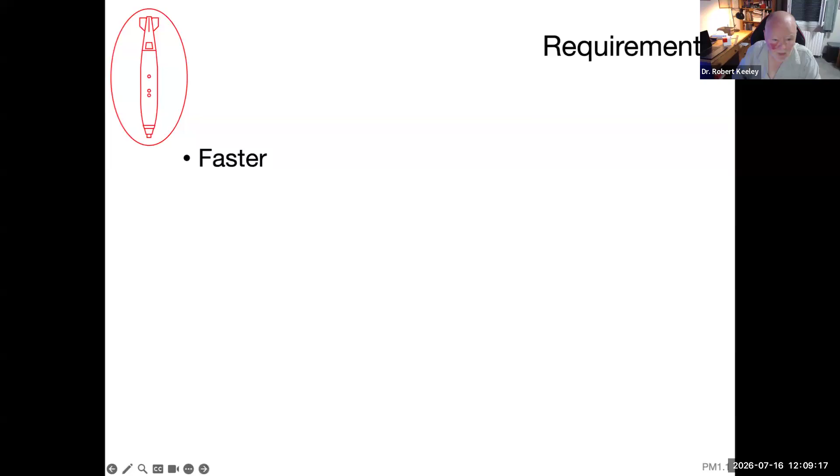So our requirement, and you'll remember this doctrine from before, we need to know how we're making this work faster - that's about improving productivity in terms of meter squared per hour - how we can make it cheaper, reducing our cost in terms of dollar per square meter, or can we make it safer? This is an interesting question, because manual demining is already generally very safe if the IMAS protocols are followed, so the product of manual demining is also generally fit for use if those same protocols are followed. So our requirement, if we're trying to make things faster and cheaper, is no overall reduction in safety. That's the minimum that we require.

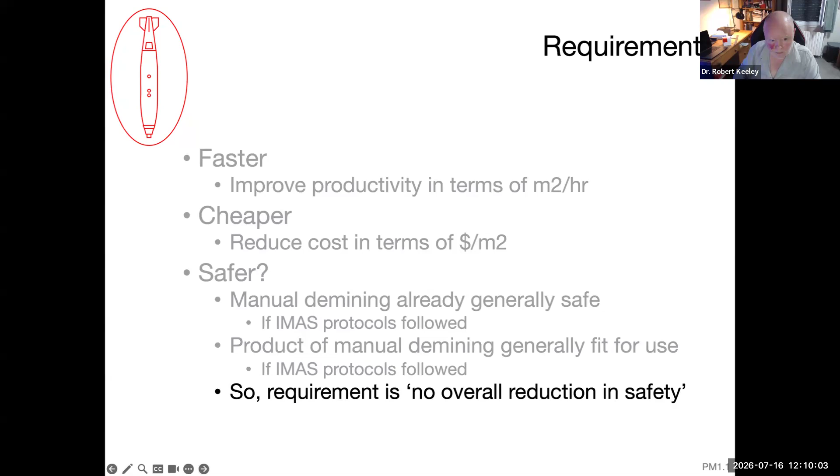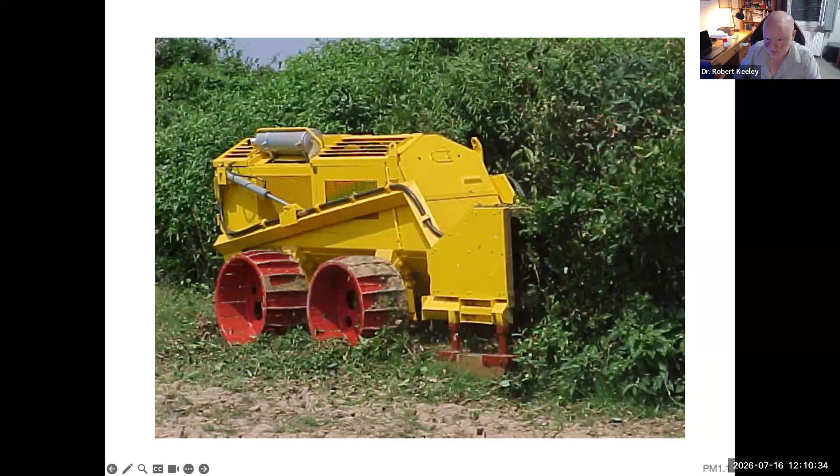And there have been solutions made in the mechanical world, such as this machine, for many years. This was developed as a brush cutter. You can see it's remote controlled. There's no cab on this. It's not crewed, and it was designed to cut down, in this case, the bamboo in Cambodia that people like our manual deminer were having to spend a lot of their time cutting before they could get to work.

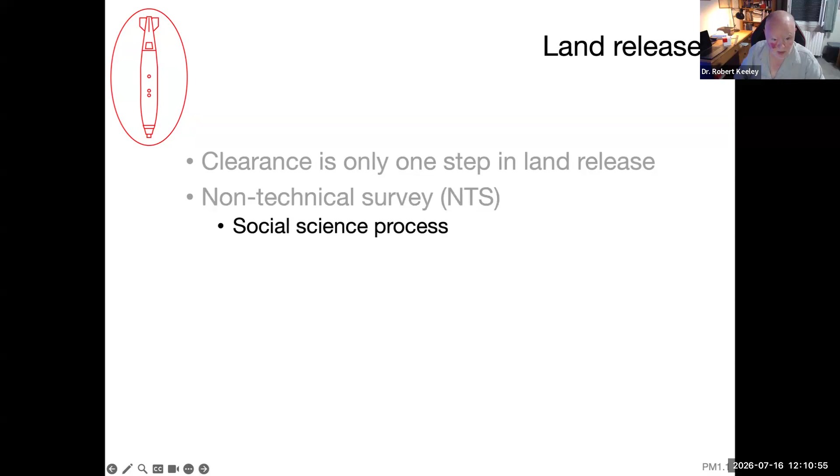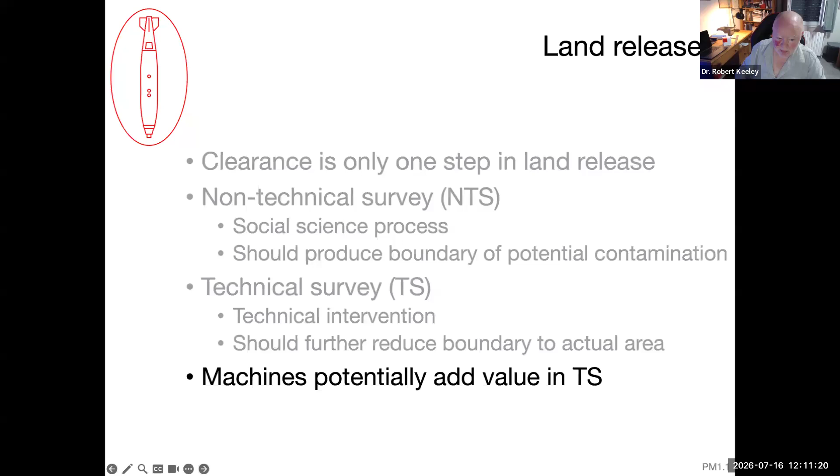Since those original early days, we've developed this concept called land release, and clearance is only one step in land release. It starts with something called a non-technical survey, the NTS, which is a social science process, and that should produce a boundary of potential contamination. That can then be followed by a technical survey, which is a technical intervention, and it should further reduce the boundary to the actual area that is contaminated. So machines in particular potentially add value in technical survey as well as in clearance, either directly or by reducing the vegetation so that they enable, for example, dogs to be used on that cleared area.

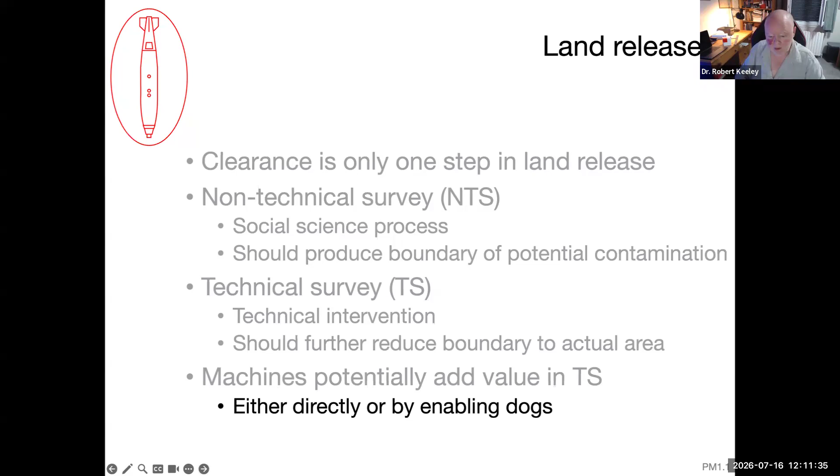So the aim of our presentation today is to introduce testing and the evaluation of machines, to introduce some of the problems that we have and what we need from testing arrangements.

Right, so common types of machines. We can describe machines by three different attributes: the type of tool that they employ, whether they are invasive or non-invasive, and whether they are crewed or remote controlled. Size is also a factor, and we'll be talking about that later in more detail.

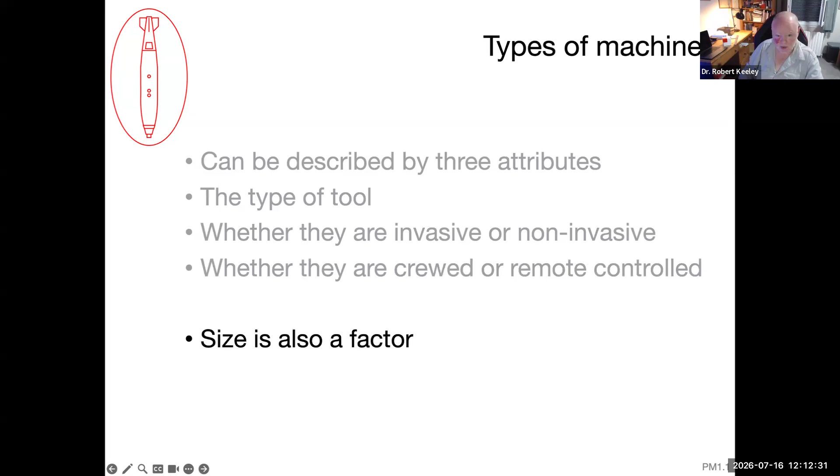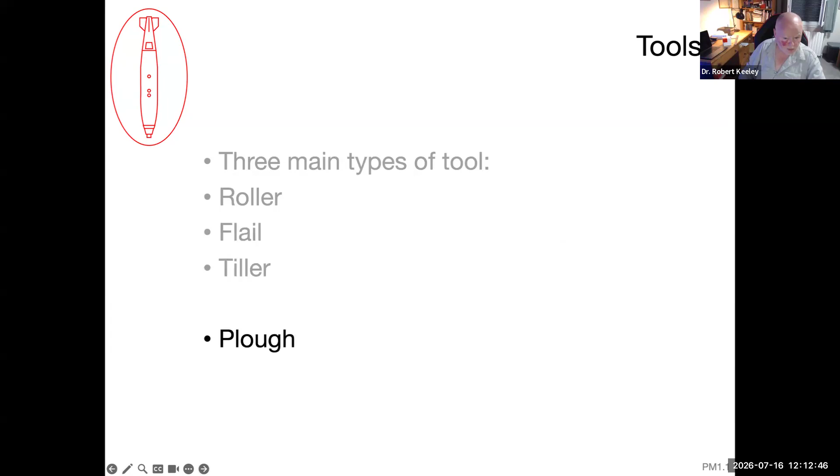So there are three main types of tool. We have rollers, we have flails, and we have tillers, and I will introduce all of those. There's also plows and explosive hoses, although we won't talk about most of these last two in detail because they're generally used in military minefield breaching rather than mine clearance. Happy to talk about them afterwards if we've got time, but today I'm going to focus on the three main types of tool.

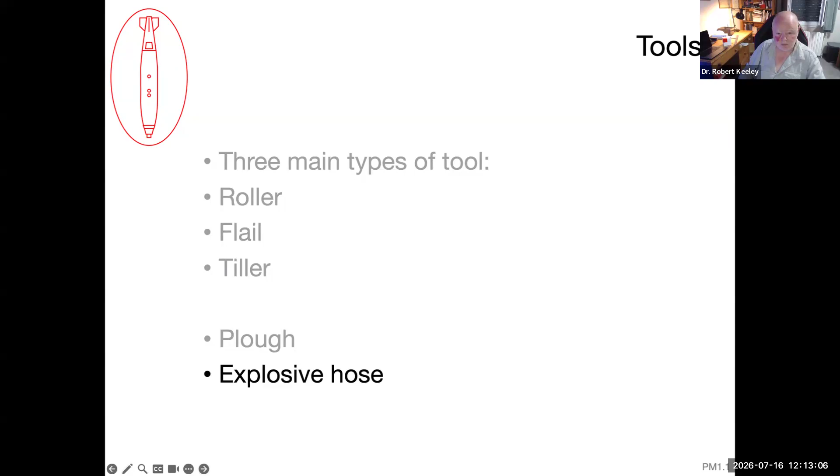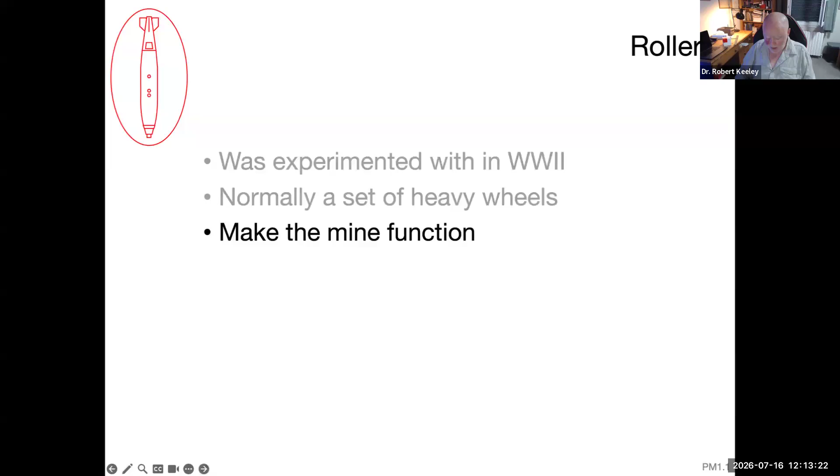That's what we'd normally expect most anti-tank mines to function when the weight of the tank goes over the top of them. So what a roller does is it's built onto the front of the tank so that the mine detonates safely in front of the tank.

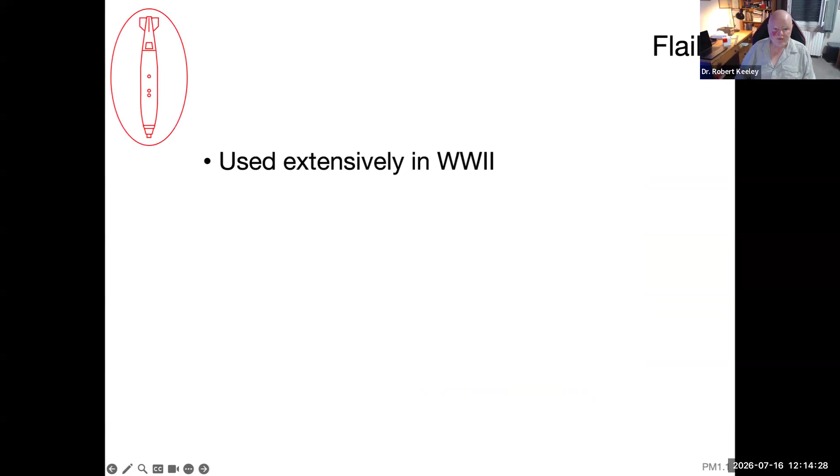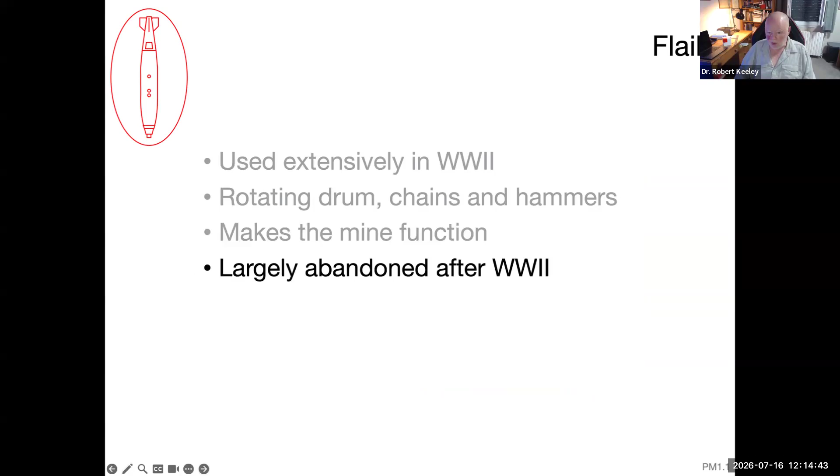So then we have flails. These were used extensively in the Second World War. It's a rotating drum with chains and hammers fitted to the end of those chains, again designed to make the mine function as intended. They were largely abandoned after the Second World War, but were rediscovered after the Falklands War in 1982.

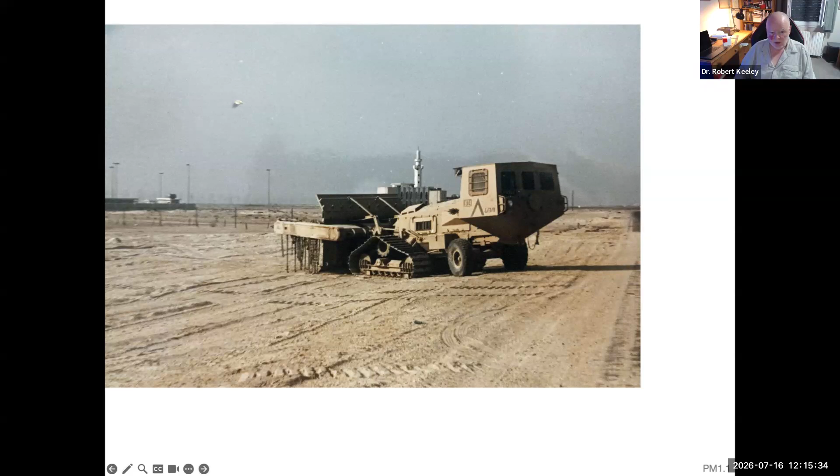Here you can see - I was just lucky with this photograph - we managed to capture the chains turning, and you can see the hammers on the end of the chains striking the ground. Please note that they're striking the ground, we'll come back to that later.

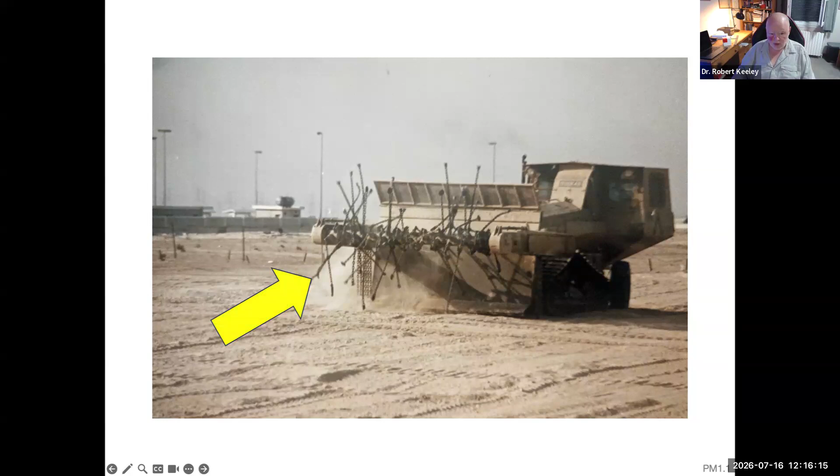You can also see that the cab, because this is a crewed vehicle, is situated right to the rear of the vehicle, and there's also a protective shield between the tool and the cab. So here's our chain and the hammer on the end of it.

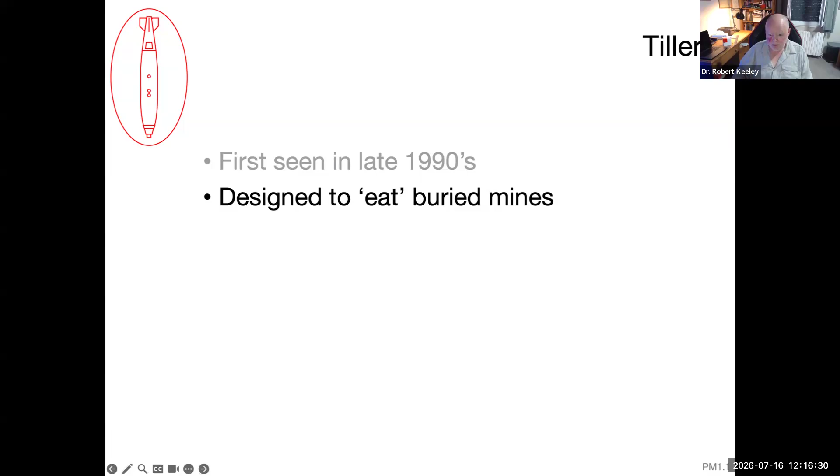And then finally, tillers. Tillers were first seen in the late 1990s, and they were designed to literally eat or chew up buried mines. So this was a very different idea. Because of that, the tools had to be very strong to withstand the explosion if they actually detonated the mine. So because the tool was big and heavy and strong, it needed a heavy vehicle to carry it. So the first tillers were stuck onto the front of tanks or similar vehicles.

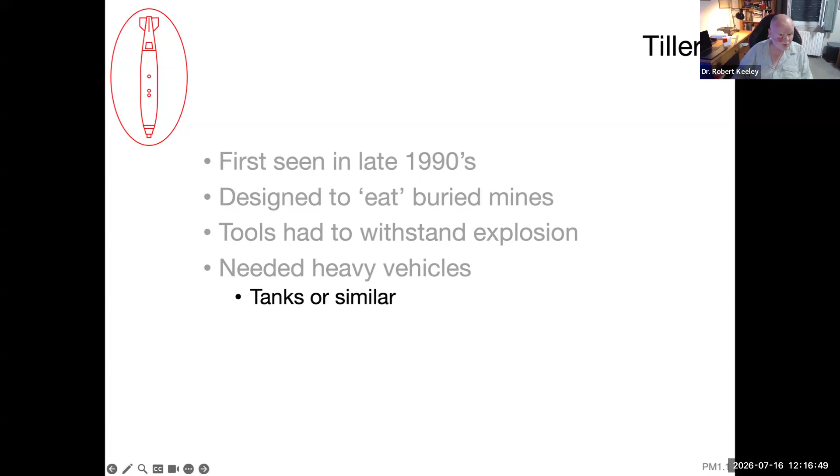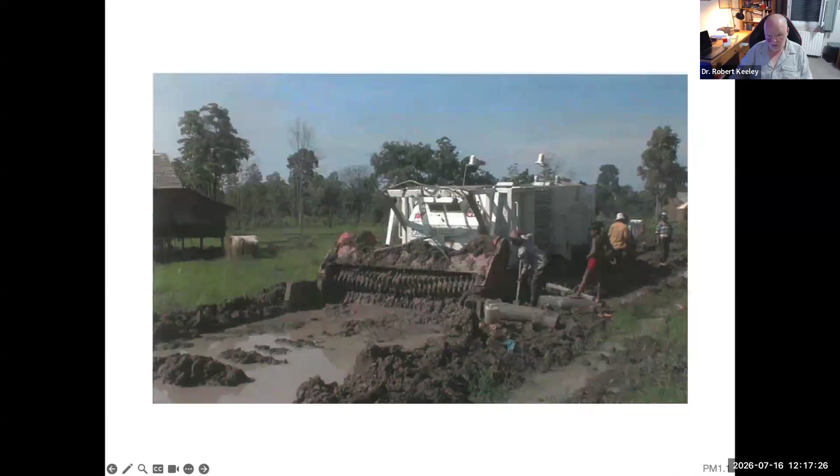And they brought one to Cambodia while I was there, and we told them it was going to sink. They didn't listen to us, and it sank. So this one, it took 3 days to get it out of this rice paddy. That's because it was so heavy.

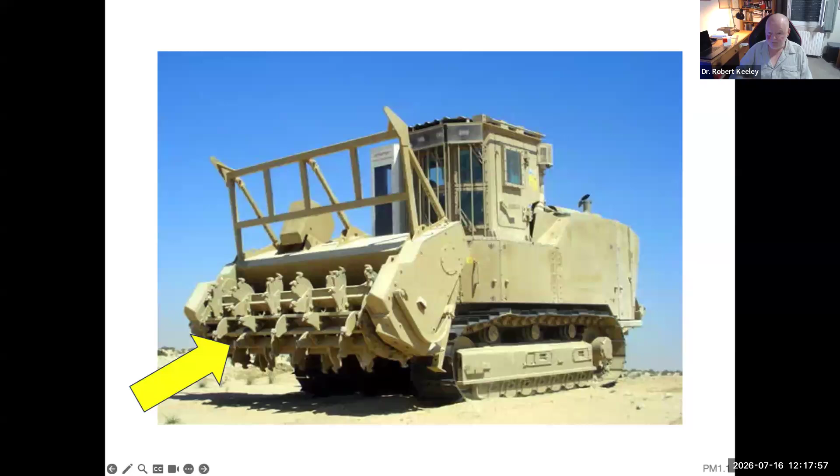But a few years later, a company developed a new type of tiller, and you can see it here. The tiller is actually hollow, so rather than being a big heavy drum, because it's hollow, the explosive force could pass through the drum, and it meant the vehicle could be much lighter. Now this one itself is still quite heavy, but they have made much smaller ones since.

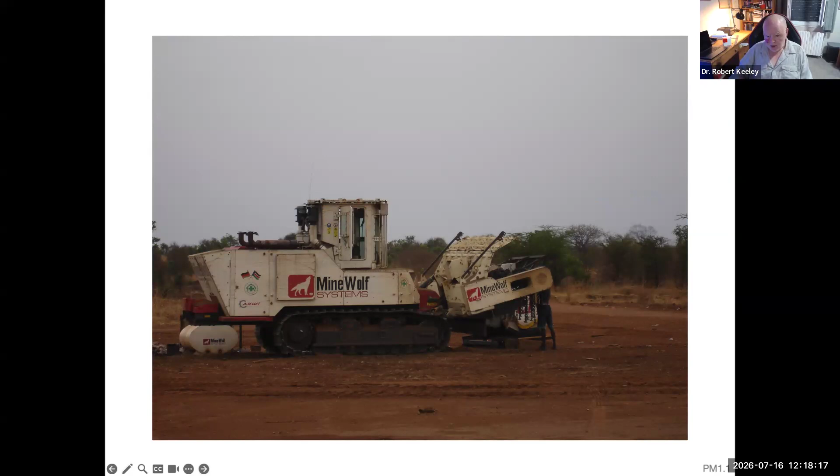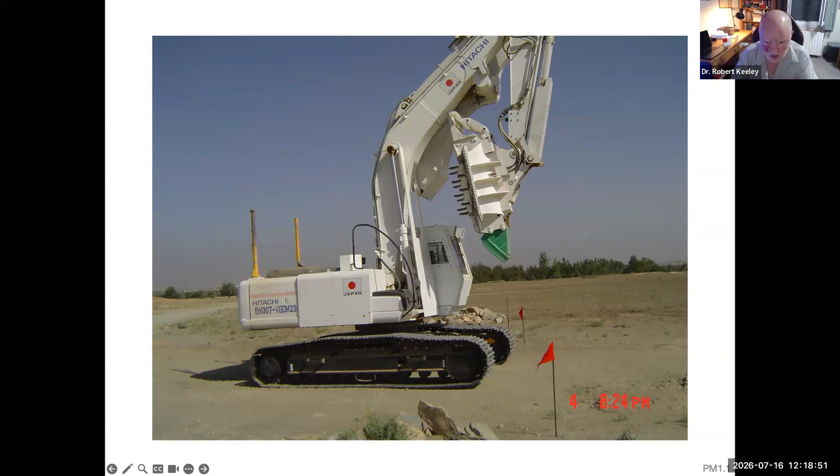So we've talked about invasive machines, we've talked about remote controlled or crewed machines, and we've introduced all three of the main tool types.

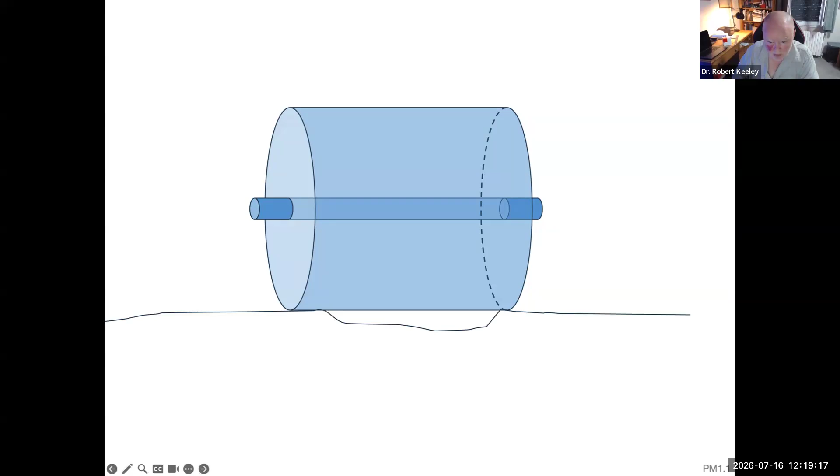But they all have a disadvantage. Essentially, whether it's a roller, a flail, or a tiller, it's essentially a cylinder, and it works like a cylinder. The problem is it's great on flat ground like a football field, but the moment you get irregularities in the ground, and if a mine's in that irregularity, the tool will miss it. Similarly, if there are rocks, fence posts, or other obstacles the machine has to drive around, there's a chance it will miss an area. So for that reason, we don't regard machines as being 100% effective as a primary clearance tool.

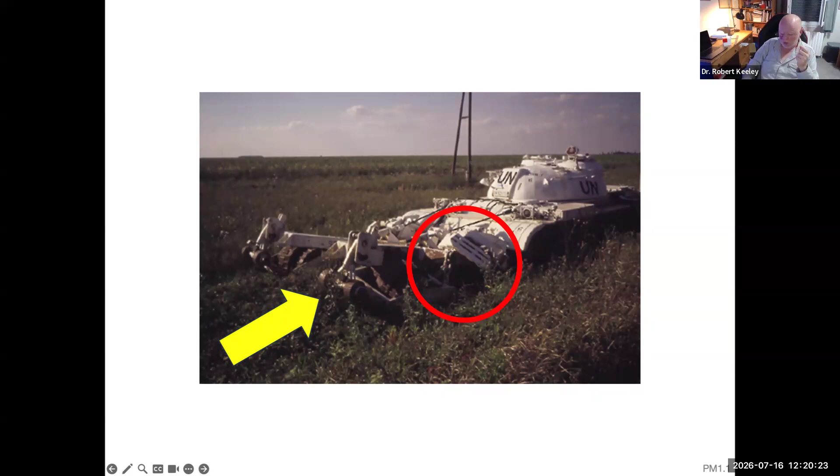You remember I showed you this picture before, and I said we'll come back to it. So here was our roller, but what this has got here is there's a plow added behind the roller, and this was not improvised - this was done from the factory. The reason the plow's there is to catch any mines that are missed by the roller and push them to one side. This demonstrates that even the manufacturers of this equipment recognized that the rollers weren't 100% effective.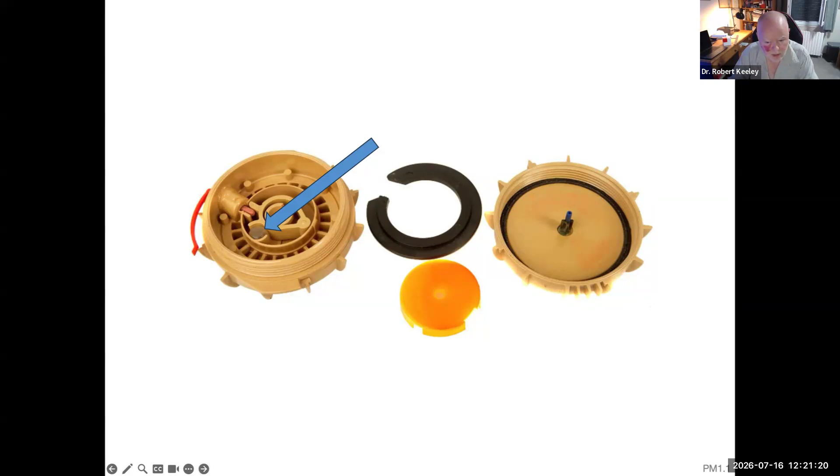What this means is that when you step on the mine - and I wouldn't recommend anybody does this - there is a tiny, tiny delay. The air, as the mechanism's trying to work, is being held back by the air escaping through this tiny hole. It only adds a fraction of a second delay, but it was built in for a particular reason, which I'll explain now.

In the 60s, various armies started developing thermobaric or fuel-air explosive weapons, designed to be detonated over a minefield, and the overpressure from the explosion would detonate all the mines underneath it.

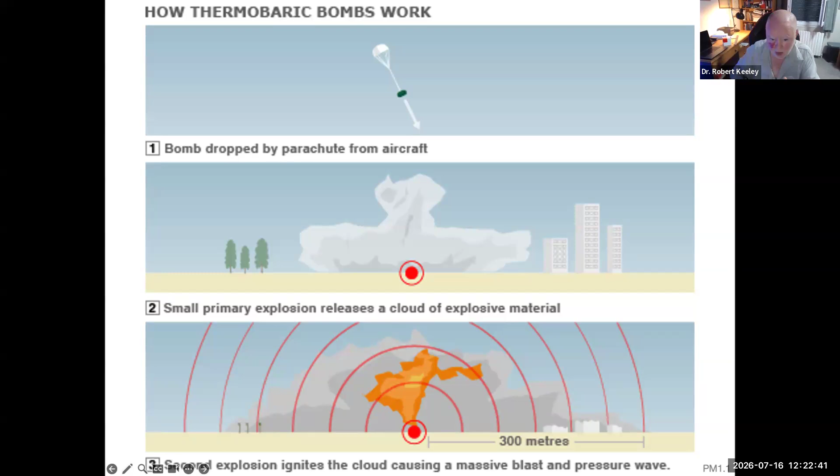Now, thermobaric bombs have gone on to be used for other things, but this is what they were intended for. And so what we see after that, as is normal, people invent a measure, then somebody invents a countermeasure. There is a whole generation of weapons, such as this Soviet era mine called the PMN2 and that VS-50 Italian mine I showed you before, that have these defensive mechanisms against blast overpressure.

Now, it's not a long enough delay to mean that a person standing on the mine can step away from it - that doesn't happen except in Hollywood. What it does mean is that the short, sharp impact you get from something like a flail doesn't always detonate these mines. These mines weren't designed to be flail resistant, but they are.

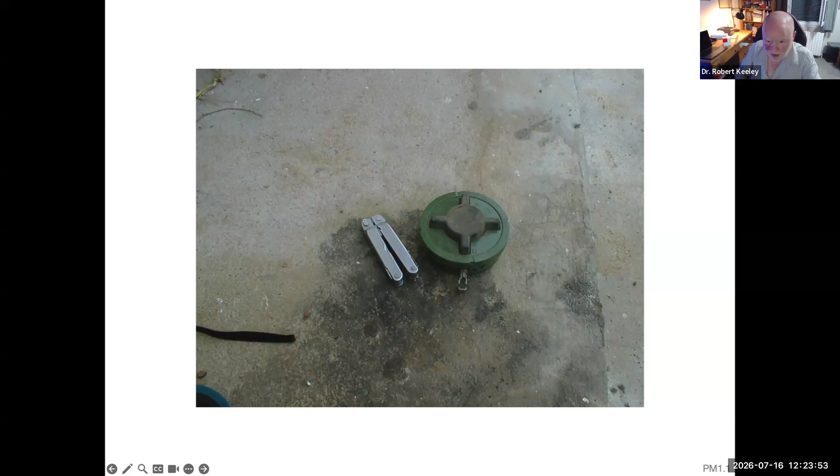In fact, when we did some tests on the VS-50 in Kuwait in '91, the team conducting the test found that a flail was only 50% effective at clearing the VS-50 mines. So we had to rethink how we were going to use the flails as a result. That's another reason why we can't always consider machines as 100% effective.

But they still have a use, and we can talk about that more. But I want to move on now to this thing called the CEN Workshop Agreement.

But before we do that, are there any questions so far? Yeah, just checking in. I don't see any in the Q&A box, but a reminder to everyone, feel free to pop them in. I know we're getting a lot of information really fast, so feel free to ask questions. Quentin has their hand raised, so I'm going to give them permission to talk. Yeah, they might want to ask a question. So, Quentin, you can go ahead.

So Robert, just a quick question on when you classify machines by type of tool, invasive or not, crude or not - you did talk about this when you talked about combinations of tools, right? So a combination of a roller and a plow - how effective is that roller plow combination?

That's an interesting question. The Soviet military obviously thought it was a good idea because they built the thing, and plows are used in various NATO armies as well. The problem with the plow is that it doesn't clear anything, it pushes it to one side, so it becomes somebody else's problem. And what also happens, because of the nature of plows, is it then puts that mine into a berm of soil that's been turned over. So we've destroyed any pattern in the minefield, and we've now made the job altogether much, much harder.

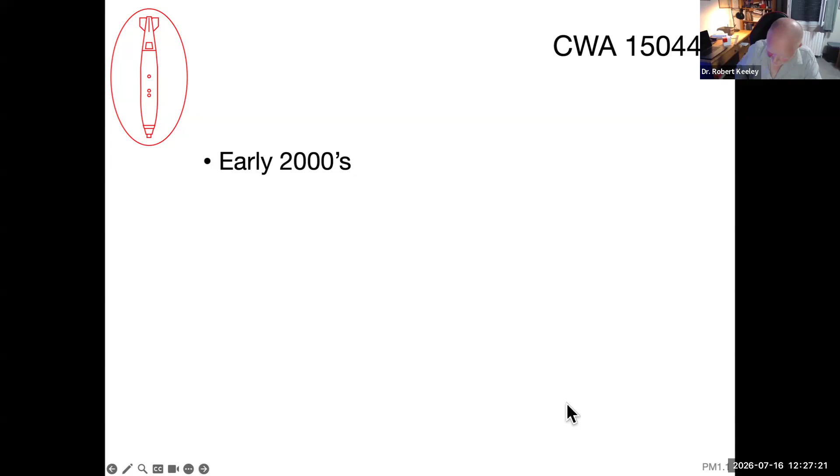And for various reasons, they dabbled with a series of mine action standards in the early 2000s. One of these was a standardization or testing arrangement for mechanical demining equipment. This was largely picked up and developed at the Swedish Engineer Centre, SWEDEC, obviously in Sweden. It was designed to test the effectiveness and survivability of machines.

Survivability, crew survivability, was tested by shooting the cabins of vehicles with 7.62mm ammunition, which was held to be similar to the effect of a piece of fragmentation from a mine.

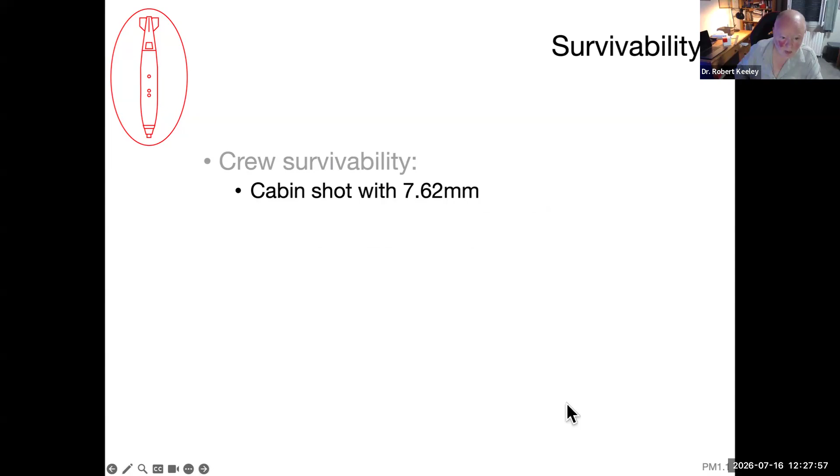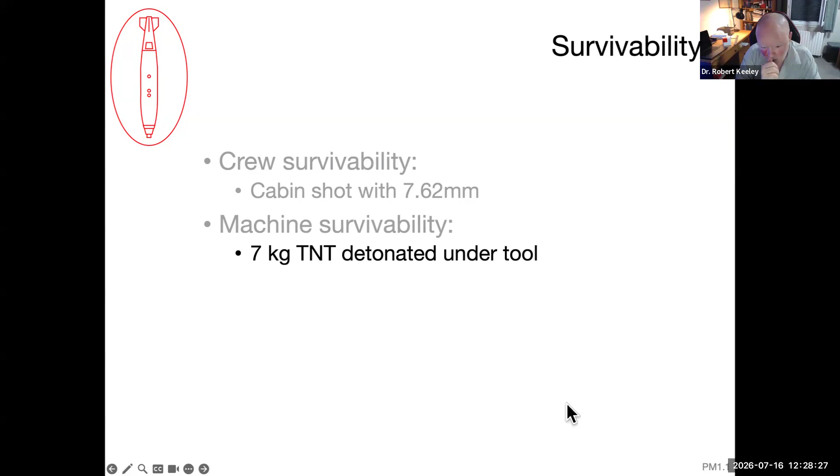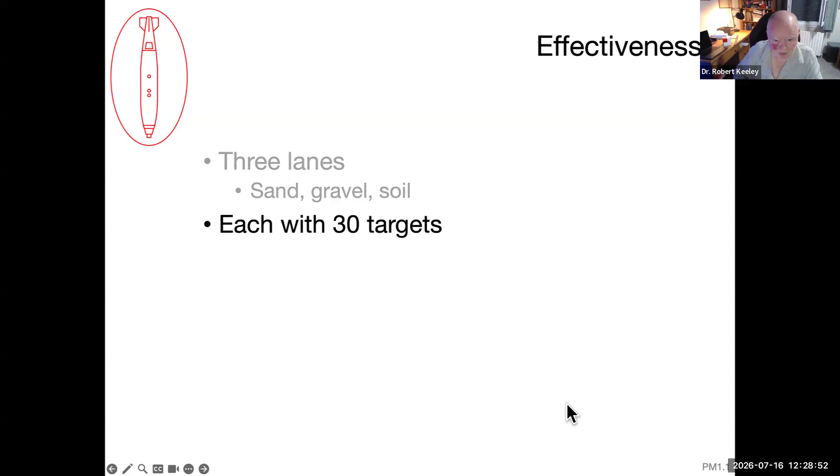Effectiveness was tested by building 3 lanes - one of sand, one of gravel, one of soil - each with 30 targets in the lane, as they were trying to establish some sort of statistical significance with 30 targets.

They used Swedish AP mines that had been kept in inventory for testing purposes, which they were allowed to do under the terms of the Anti-Personnel Mine Ban Treaty, but they had been rendered safe. They'd taken the main explosive charge out, and left the detonator system in, if I recall, so that the mines could be inspected afterwards to see whether they'd functioned.

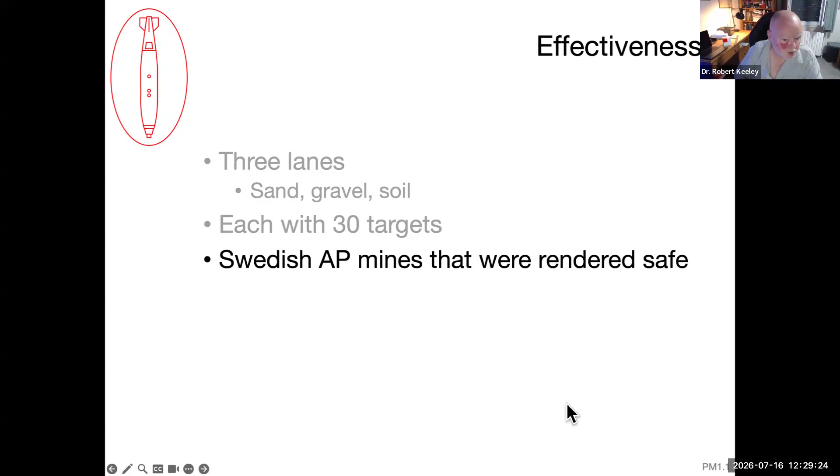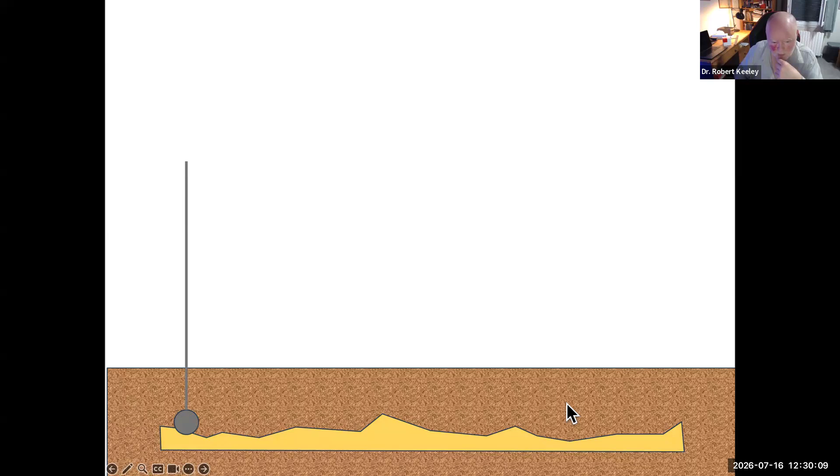But they also added something called a witness plate, and I'll talk about that in detail because it's very interesting. Here's a cross section of the soil in our lane, and they added these witness plates across - a piece of timber across the whole width of the lane, about 30 centimeters deep. They put these witness plates along the lane, as I've shown here, and then after the machine had processed the ground, they could recover the witness plate and see how far down the tool had managed to penetrate, and therefore potentially destroy the mine underneath.

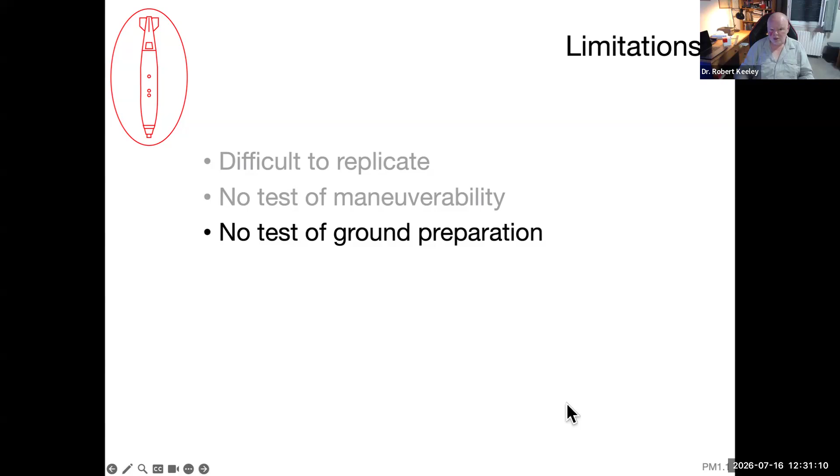There are limitations to this concept. First of all, it was very difficult to replicate because who was going to be able to get hold of these Swedish AP mines if they wanted to do their tests somewhere else? Those of you who are scientists know that the ability to independently replicate a test is very important. There was no test of maneuverability, no test of ground preparation - like the machine I showed you earlier, which isn't designed to detonate mines, just to remove vegetation. There was no test of acceleration on the driver in a crewed machine, and no test of overpressure in the cab, again on a crewed machine.

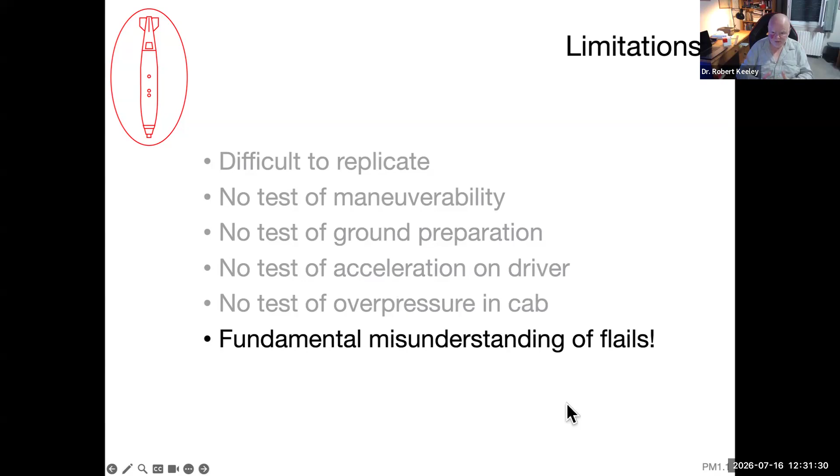But ultimately, the biggest problem for me was a fundamental misunderstanding of how flails work. Remember I told you the idea of a flail was originally to make the mine function as intended. If you were to go dig up your garden today, you would not do that with a chain with a steel ball on the end - steel balls are fundamentally not very good digging tools. So they weren't intended to dig the mine up. But somehow, in the development of that large Swedish machine and the testing arrangement, people misunderstood this. The inventors were convinced their job was to smash up the mines like a tiller does, so they needed a huge amount of power to get those hammers of that flail underground - 100 horsepower per meter of tool, an enormous amount of power. This pushed them down an evolutionary path toward a very big machine, which actually wasn't necessary at all.

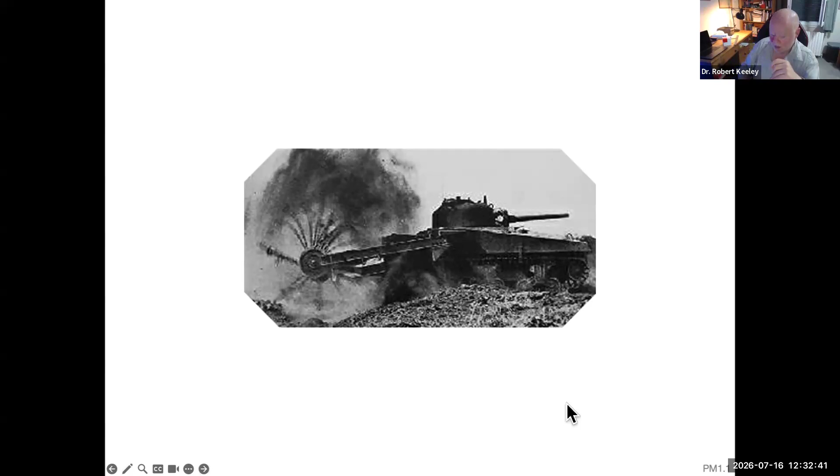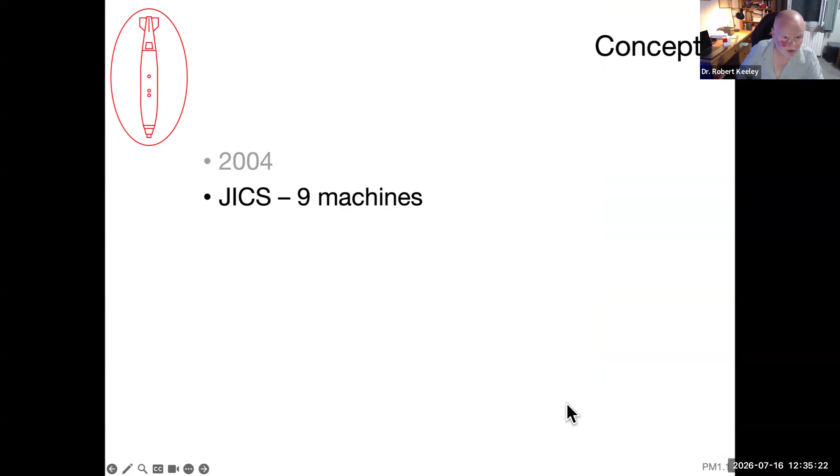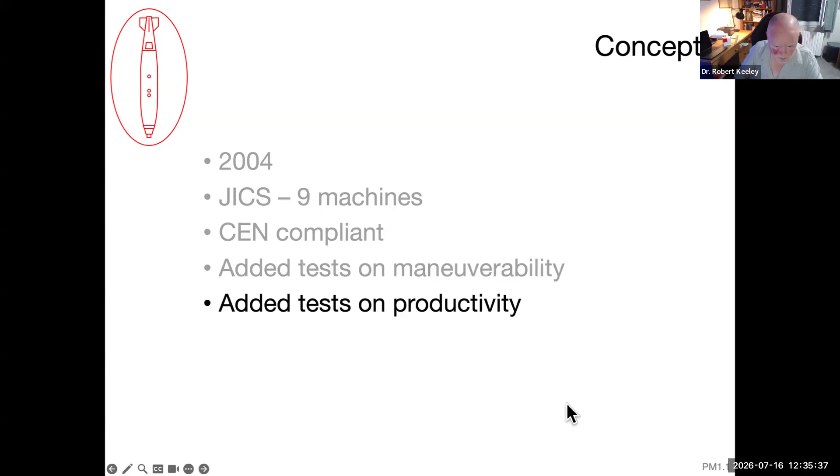Okay, so Japanese testing in Afghanistan. The idea was this was something done in 2004. It was a Japanese organization called JICS, and they had nine machines to test, and they hired me to design a test protocol for these machines in Afghanistan. The tests we devised were CEN compliant - they included all the CEN requirements, but we also added tests on maneuverability and productivity. We'll talk a bit more about those.

There were some complications with some of these machines due to something which would take a long time to explain in detail, but the machines were designed only to clear anti-personnel mines, and the problem is there weren't many minefields in Afghanistan that we could guarantee didn't have anti-tank mines in them as well.

And that was a communication issue between the Afghan Mine Action Program and JICS. But these 9 machines turned up.

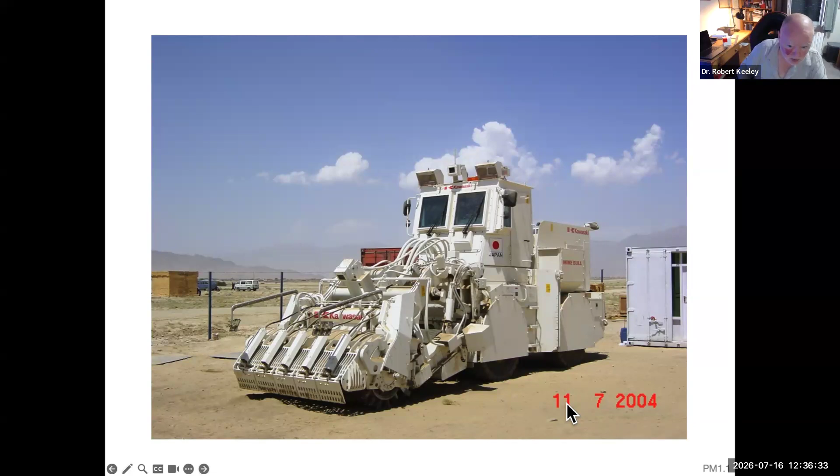So we included a test on maneuverability. We took 30 degrees as an arbitrary measure of whether a machine could drive up, drive down, drive across a 30-degree slope, and work on a 30-degree slope in the same way. So this was us laying out some lines.

The idea was that we buried it underground in the test lanes, and if the machine hit the mine, we'd expect to see some damage to our Tupperware boxes, and we'd expect to see the paint scattered about.

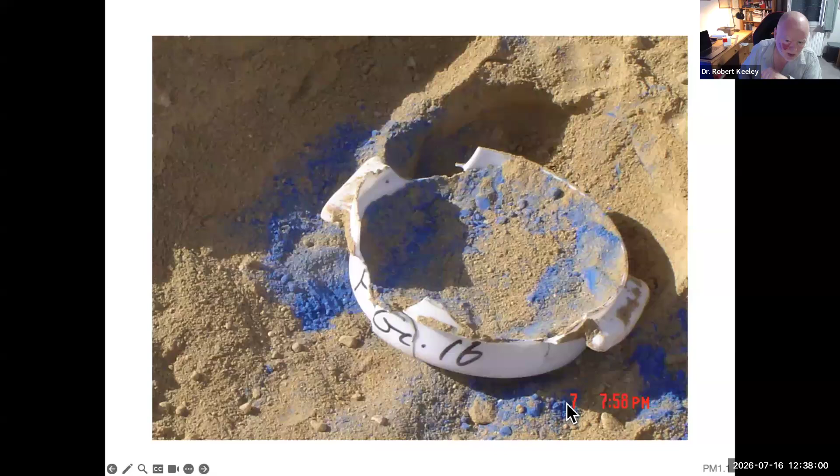So it was a safe test, and we could benchmark the boxes by putting weights on them to see whether they broke at the same operating pressure as an anti-personnel mine might detonate. So that's how we benchmarked the targets. It's a very cheap and very effective, very visually effective way of testing the machines.

But we also added a productivity test. What we did was give each machine a hectare of ground and said, there may or may not be some mines in here, and we're not going to tell you how many there are. You can clear this piece of land, take as long as you like, and tell us when you're finished.

So in other words, we forced them to make a decision about how fast they would go over the land, so that we would get an idea of whether they were cost effective or not. We'll talk more about that in a minute.

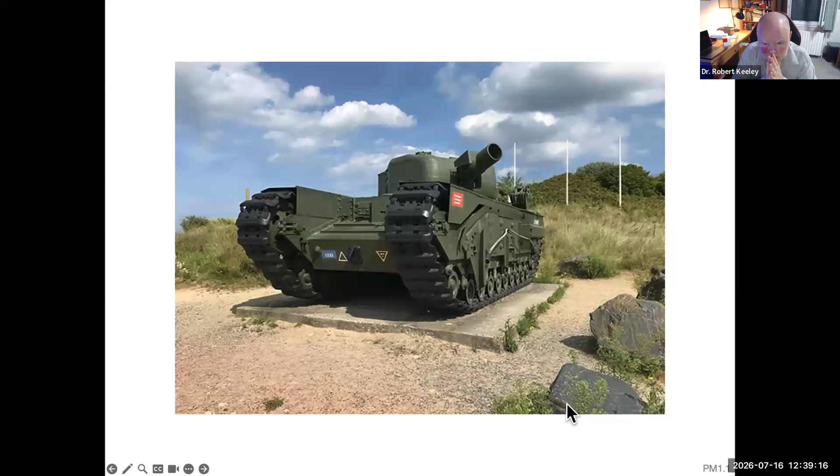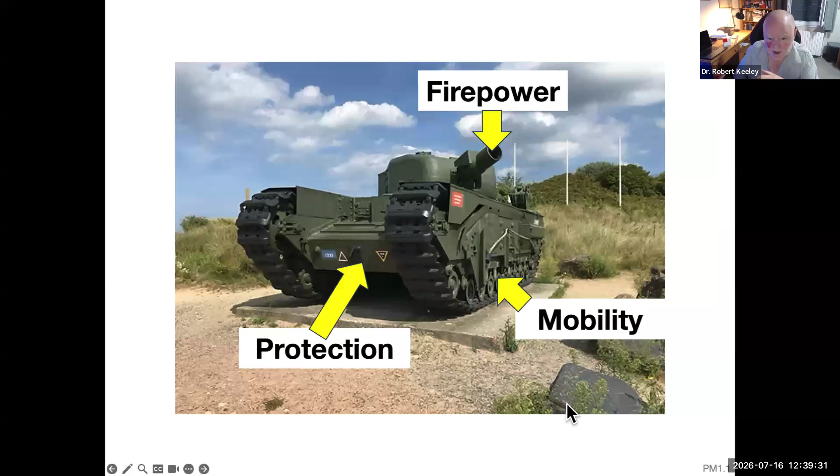Okay, thank you. Where this comes in is this thing called the armor triangle. So here we have a tank, and there are three attributes to any armored vehicle, any armored fighting vehicle. We have to consider its firepower, we have to consider its maneuverability or mobility, and we have to consider its protection. And these things are a trade-off.

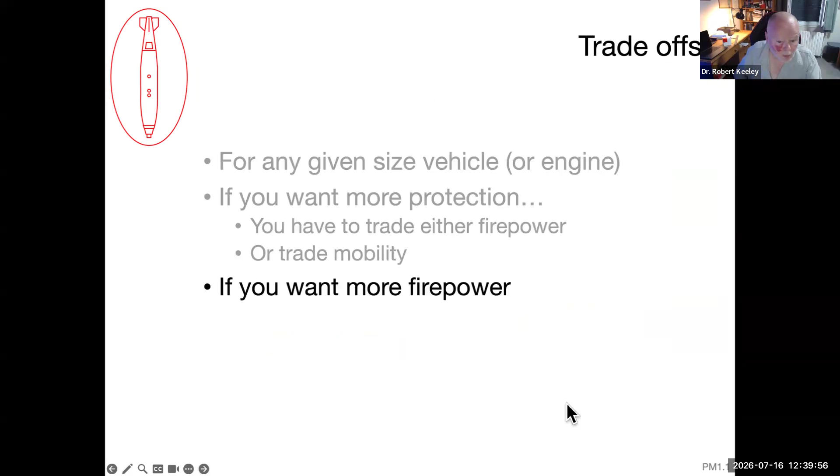For any given size vehicle or any given size engine, if you want more protection, for example, you have to trade either firepower or mobility. Because if you want more protection, that's more armor plate. If it's got more armor plate, it's heavier. If it's heavier, it's less mobile. If you want more firepower, again, for any given weight of vehicle, you have to either trade protection or mobility. And this is the armor triangle.

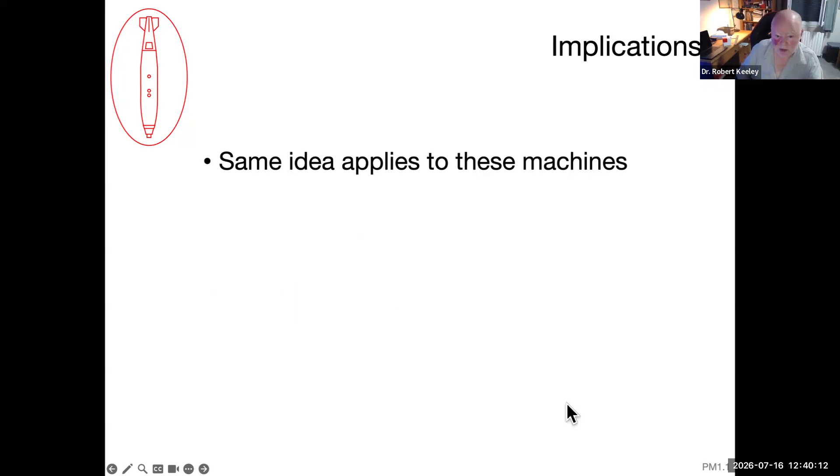So the implications of that apply to these mechanical demining machines as well. To get more power to the tool, you need a bigger power plant. The bigger the machine, the more expensive it's going to be, and it starts to become less cost effective, because remember, we're comparing it to that manual deminer and the amount of land that he or she can process in any given hour.

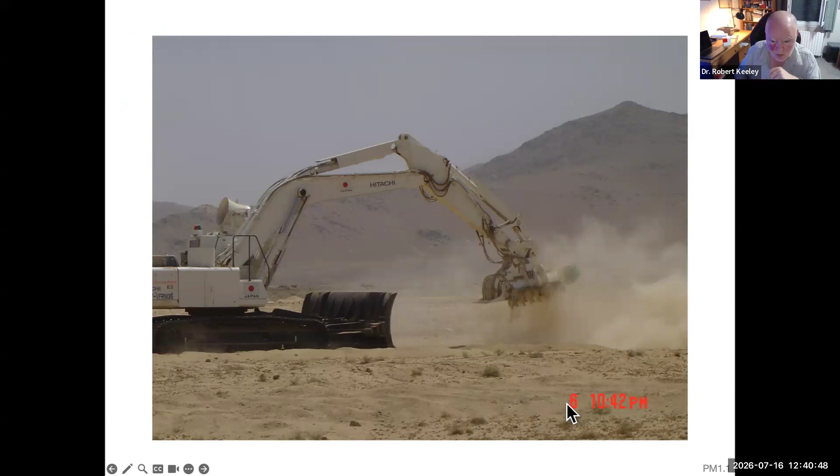So this machine, which I showed you earlier in Afghanistan, was actually the most protected. It was the only one that survived the 7 kilogram explosion under the tool, but it took 44 liters of diesel per hour. And in Afghanistan in 2004, a liter cost $3 because it had to come all the way up from the south. That was more expensive than the manual deminers it replaced. So although the machine was actually very effective, and it works, it was not cost effective.

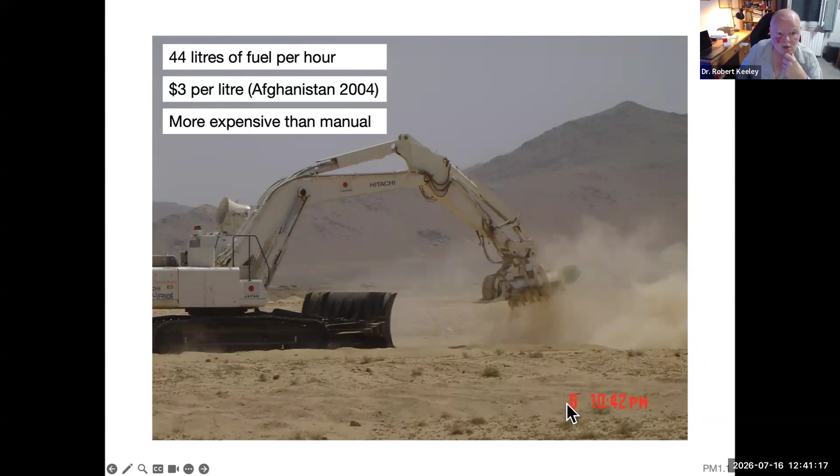And this is one of the issues we're testing with these machines. So any questions about the armor triangle?

Okay, let's go on to the last section: the current test problems. Remember our catechism: we want it to be faster, cheaper, or safer.

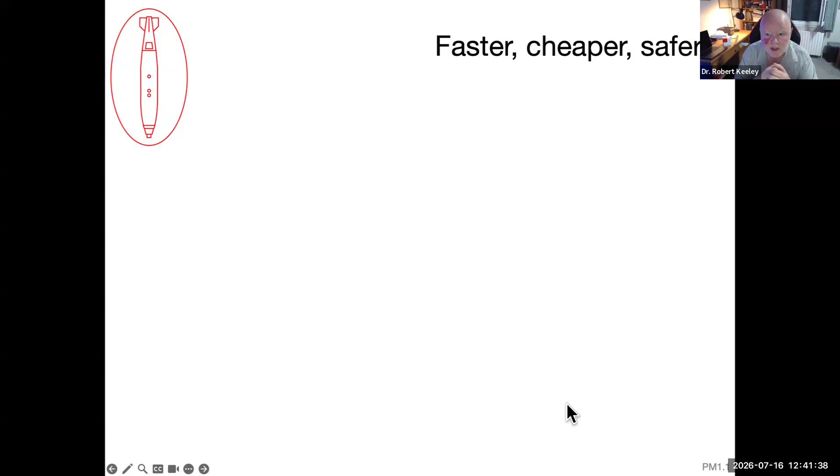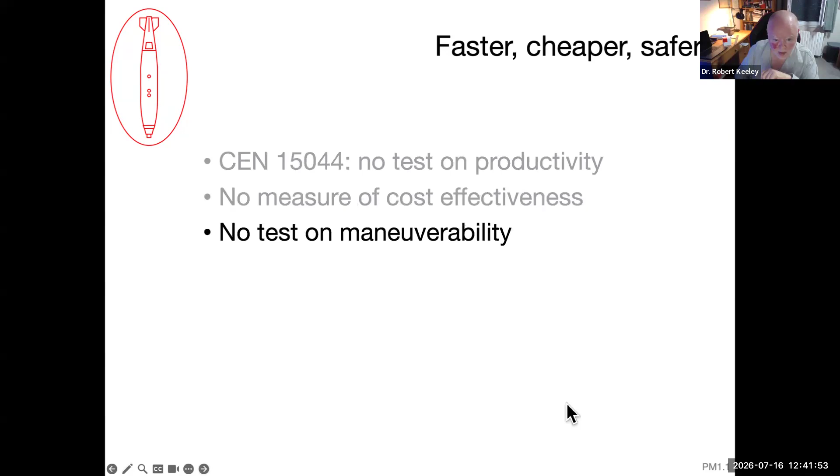The CEN test had no test on productivity. There was no measure of cost effectiveness in the test, no test on maneuverability, and it needs much better testing on survivability, particularly for crewed machines, testing for the ability to withstand acceleration or the ability to withstand overpressure.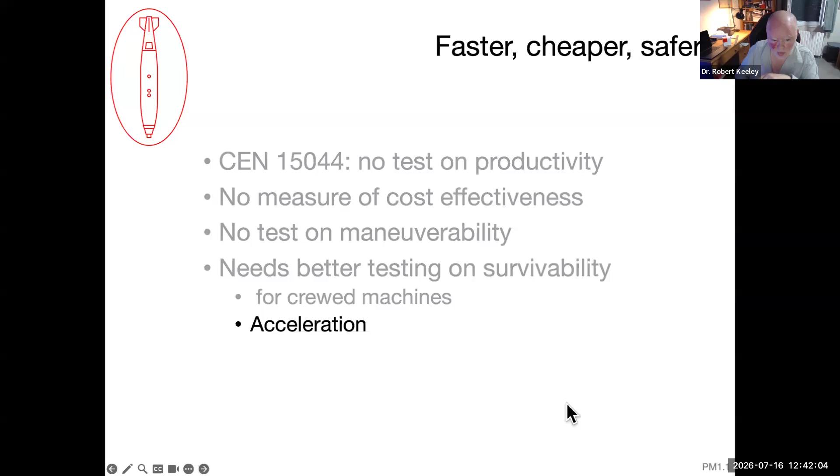And that witness plate test protocol that was included introduces a bias into the test which pushes towards heavier machines, which may be less cost effective.

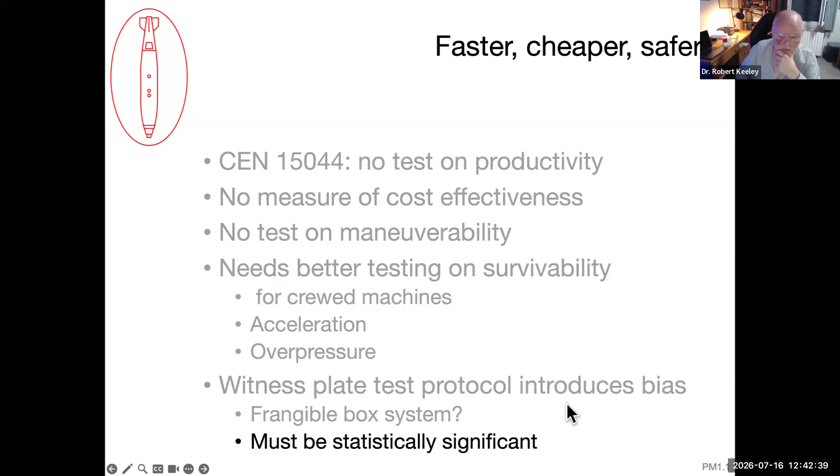The frangible box system is an idea that replaces the problem of replicating the test elsewhere, because the original test was designed around those Swedish anti-personnel mines. And again, like any test that we introduce, it must be statistically significant.

Remember, with our equipment, that we can test it in a laboratory or on a football field, and it looks safe and effective. But when we actually start using it in the field, we get environmental problems and human factors involved. So it may be that our machine is safe in the laboratory, but unsafe or ineffective in real life. Remember that machine that sank in Cambodia, for example. So we have to make our tests as close as possible to the real thing.

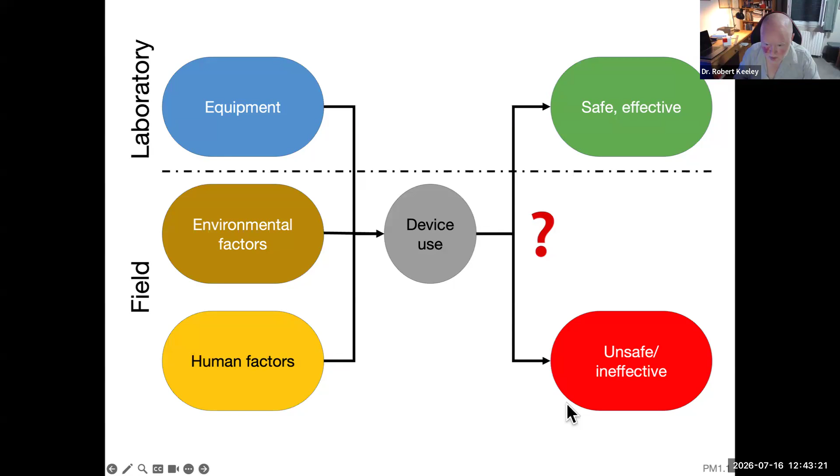Another point I think we need to emphasize is, what if it's not clearance? We need to design the test against intended results. So, for example, a brush cutter, which is not intended to detonate mines, we need to think about things like the density of the vegetation it's cutting and the rates of clearance it's going to achieve.

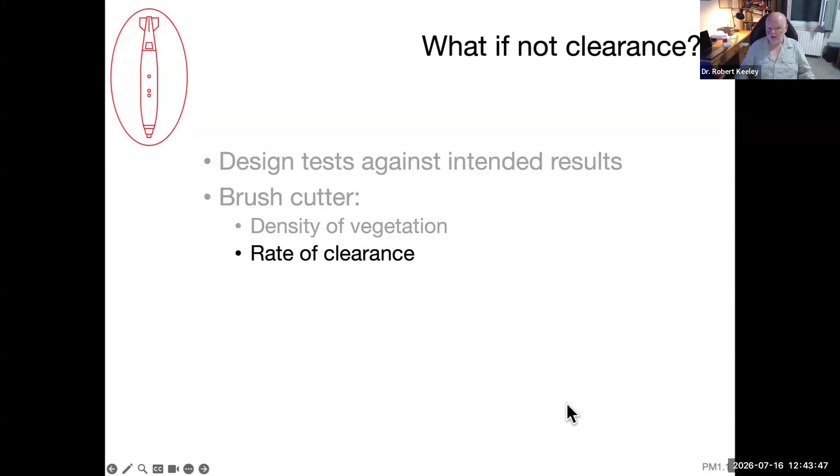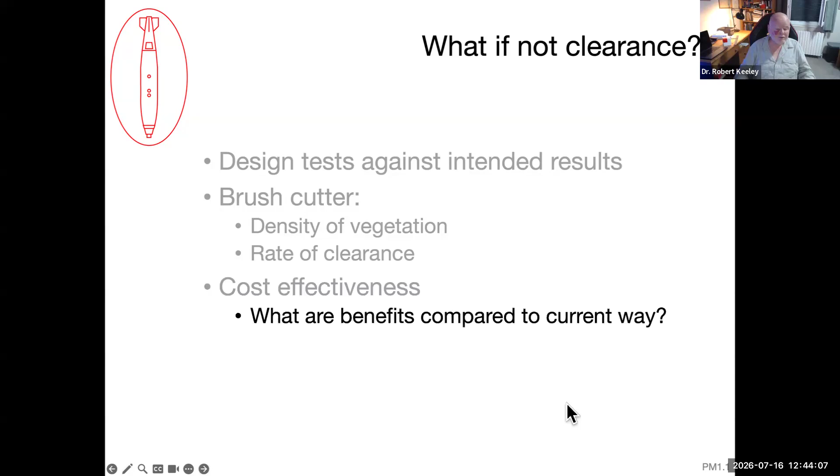We can't just apply the CEN workshop agreement standards to it. And we must always consider cost effectiveness, because if it's more expensive than our local deminer, we're better off paying for that person to do the work. So we have to always consider what are the benefits of this new technology compared to the current way that we do business.

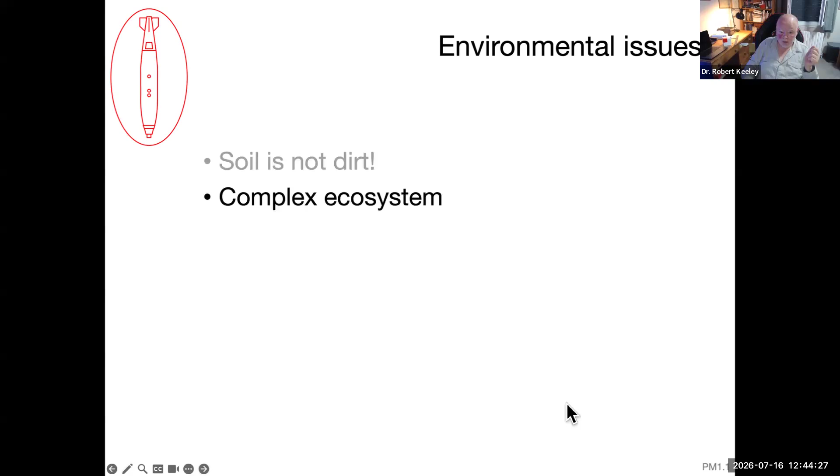Another thing which came up again in 2004 was environmental issues. We have to remember that soil is not dirt. Soil is a complex ecosystem, and machines can destroy it. We can do something called pulverization, where we just turn that ground into dust and it blows away. We can create something called hard pan, and we can create something called shear. These are both common environmental problems from mechanical equipment.

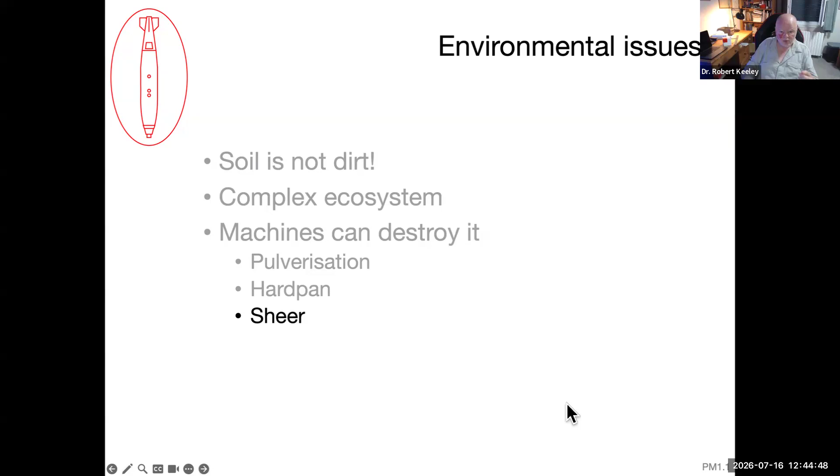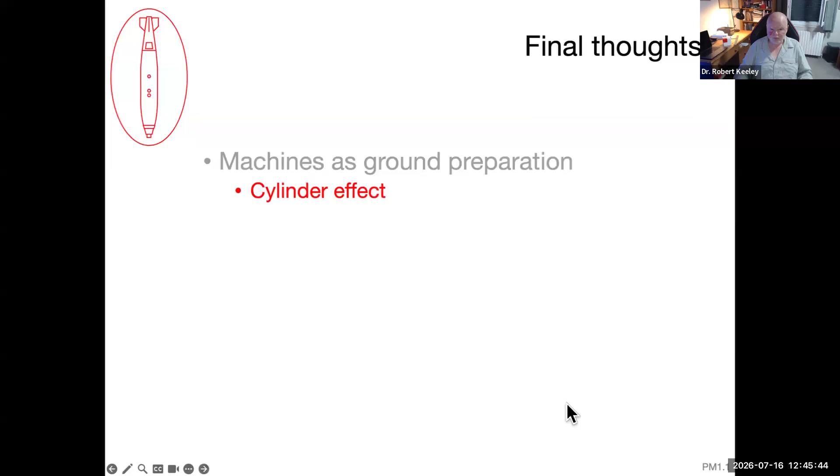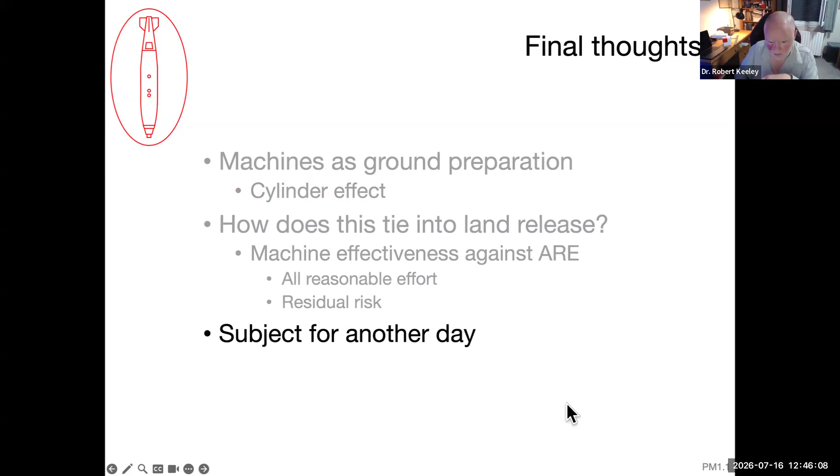Some final thoughts: machines have a role in ground preparation, but remember the cylinder effect - they won't clear every single thing in that ground because of irregularity in the soil and other problems like that. We need to understand how machines tie into land release. We need to consider their effectiveness against something called all reasonable effort, and any residual risk. The question of all reasonable effort is a huge subject, and it's a subject for another day. I can't really do it justice in the time we've got left.

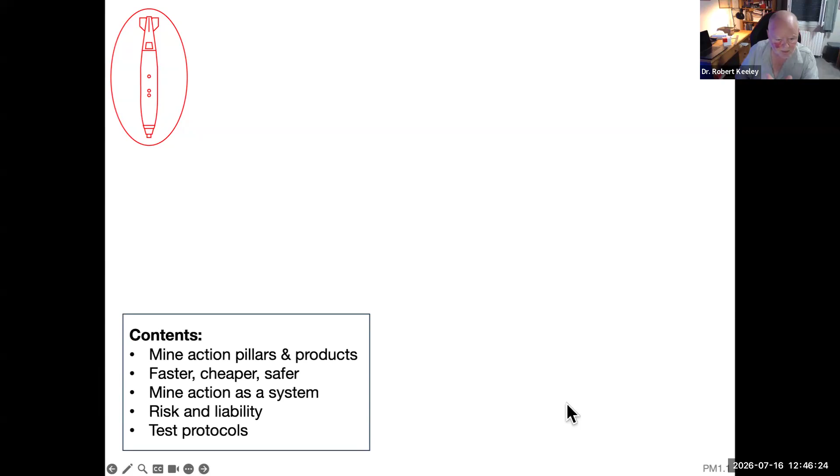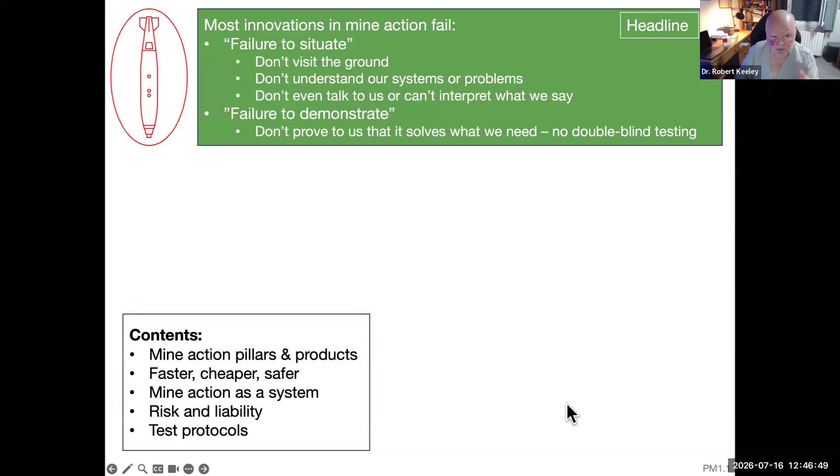So to finish, we've talked about these 5 things, the pillars and the products. We've talked about faster, cheaper, and safer. We've got failure to situate in. For innovators, the key point about this, and this came up in the first presentation, is if we don't visit the ground, if we don't understand our problems, if you don't talk to us, you won't understand how your device works for our requirements. And you have to prove to us that it works. You've got to solve our problems.

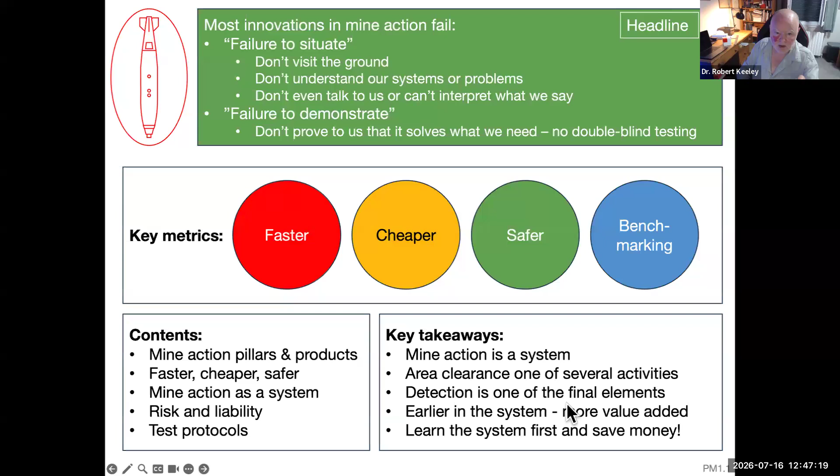Key metrics: faster, cheaper, safer, and benchmarking. Those are the same whether you're developing a detection device or a machine. And remember that mine action is a system. Area clearance is one of several activities. The earlier in the system we add more value, but please learn the system first and save your own money developing things that may not work.

So, final chance to ask any questions or open up a discussion.

Yes, now we have some questions and comments rolling in. So I'll just, the first one was a comment about machines needing maintenance. Do you have any thoughts on expanding on that?

That's a really good point. Where that ties in is there's an idea of understanding how to benchmark the productivity of a machine. We've got the potential theoretical capacity of a machine in terms of meters squared per hour. Then from that, we've got to take away the environmental factors and human factors, so what we're left with is a net product of what it can do.

Inside that issue of theoretical square meters per hour, there's the question of downtime, or as equipment people would talk about, mean time between failures. So if you hear somebody say, oh, we can do 10,000 square meters an hour, and what they've done is cleared 100 square meters and extrapolated it, saying, I've done 100 square meters in 6 minutes, therefore I can do 10,000 square meters in whatever it takes. The point is that's not how it's done, because it has to allow time for maintenance and for failures.